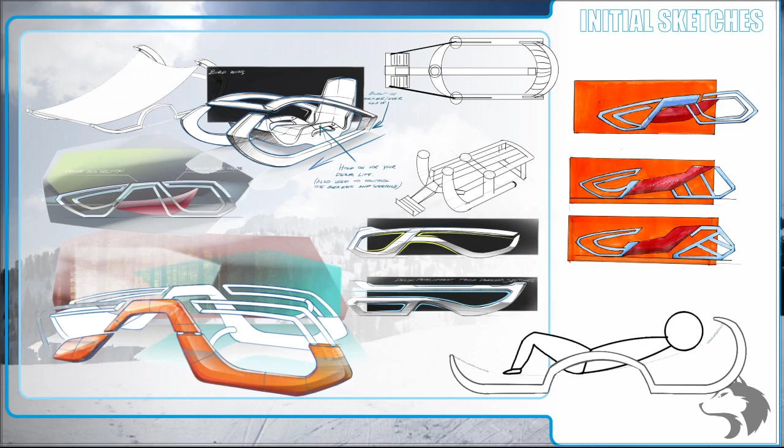Initial sketches. We gathered all of our initial sketches together and picked out the positives from each of the designs, then decided which features we would continue with. This pointed us in the direction of our design, which is a perfect balance between a traditional and a modern sledge.

In order to develop a safe and fully functional product, we did extensive research into the materials, manufacturing techniques, and ways to control and stop the sledge. We created test rigs to confirm and troubleshoot our ideas for the braking system.

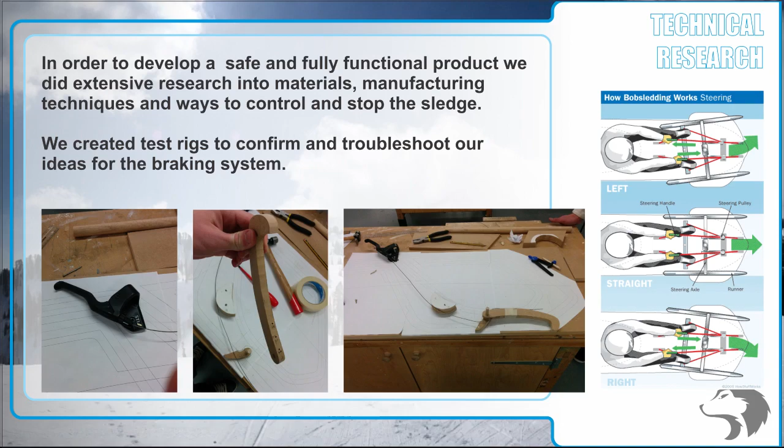For our ergonomic research, we started by gathering some secondary research and data, such as human sizes and statistics. We used this secondary research to help set up a one-to-one scale ergonomic testing layout.

We then sat a few people beside this layout and measured up against them. This helped us find the correct seating position, the correct footrest position, and the correct position to place our steering and braking mechanism. We also found from our layout that the overall size of our sledge was too large, which helped us adapt the size and alter our design.

Some additional secondary research was also completed, which allowed us to set limits to our steering mechanism so the person would not injure their wrists. Finally, we made a small rig that helped us work out how people would climb in and out of our sledge.

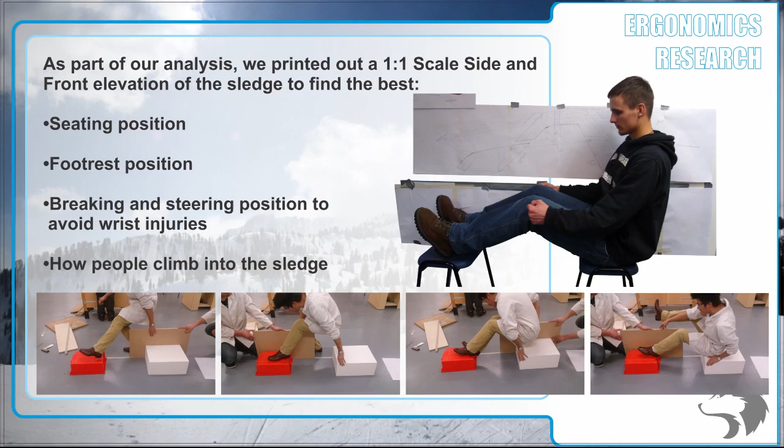After refining the design, we began to consider the practicalities of it and what materials we could use to make it. The materials we are going to use are wood, laminates, and tubular section steel, as they are available in-house for Wild Husky. For the space frame, we settled upon aluminium, as it is lightweight, durable, and resistant to corrosion.

These are all important factors, as a sled needs to be lightweight enough to carry around, but also able to withstand the forces exerted on it during use, and able to resist the severe weather conditions.

The aluminium would also allow us to bend it into shapes using a 5-axis CNC tube bending machine. We would also use TIG welding, as it is ideal for handling tricky shapes such as S shapes and tight bends. TIG welding also allows you to create clean welds when appearance counts, which in our case it will, because the aluminum pipes will be exposed.

The biggest advantage of TIG welding over every other welding technique is that it allows you to turn the power down so that you don't ruin the material.

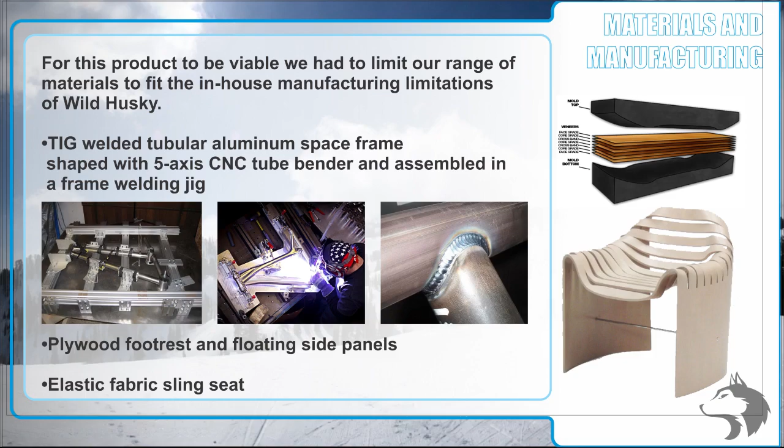We decided to use wood paneling to protect the user against the moving parts in brakes and steering. The wood panels could be bent using steam and molds to allow us to achieve the smooth curves that are the key to our concept.

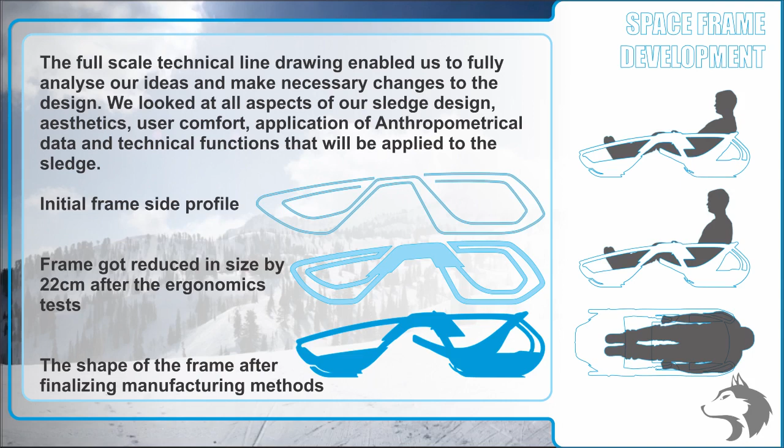The full-scale technical line drawing enabled us to fully analyse our ideas and make the necessary changes to the design. We looked at all aspects of our sledge design: aesthetics, user comfort, application of anthropometrical data, and technical functions that will be applied to the sledge.

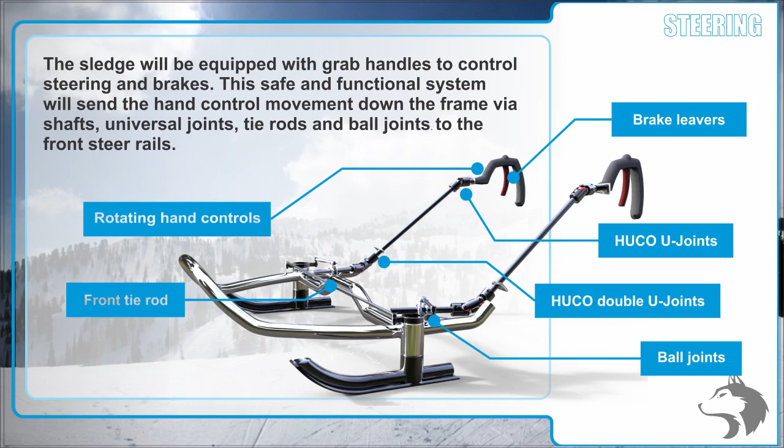The sledge will be equipped with grab handles to control steering and brakes. This safe and functional system will send the hand control movement down the frame via shafts, universal joints, tie rods and ball joints to the front steer rails.

The sledge will also be equipped with independent rear brakes. The pilot will be able to do tight turns by deploying a single claw, as well as perform an emergency stop by pulling both brake levers at the same time.

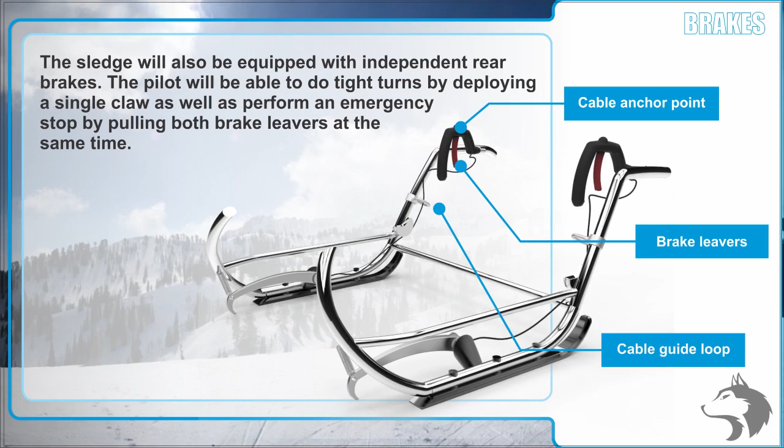Designing the graphics for these started by identifying the current trends within the winter sports market, specifically skiing. We split them into two categories, racing and freestyle. The racing skis tend to be designed all around speed and loud branding.

These graphics will often feature carbon fibre and bright colours, combined with the name of the ski or company emblazoned on it. These designs are all created to give the user the illusion that they have the most high-tech skis available and that they are fast.

At the other end of the market is the current trend with bright colours, following an almost 90s revival within the ski fashion. Here it's all about the peacock effect, with the products, as well as being functional, designed to make the user noticed by everyone else.

So we created graphics for the two different styles, with the racing design involving carbon fibre and a bright splash of colour, and the freestyle funky version featuring loud, eye-catching colours to show off the sled. We agreed that the racing style sled would be available all the time, and the bright colourful graphics would be released with a different style each season, almost like a limited edition.

We decided to use the hydrographic printing process to apply the visuals to our sled, as this can be used in a wide range of materials such as wood, metal and plastics. As a follow-up to our research, we conducted a test using industry standard hydrographic film and activator.